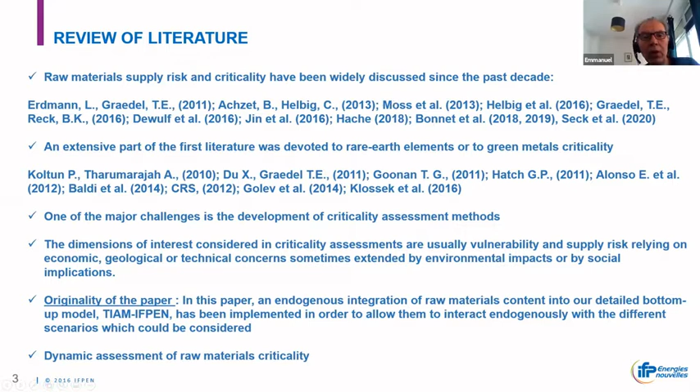So let's just talk about the model in a few minutes. As I told you, we use a TIMES MARKAL model, named TIAM-IFPEN. This is a world model. This is a partial equilibrium model. The objective function of this model is to minimize the cost of the entire system. The model is disaggregated into 16 different regions, and each region can trade fossil fuels, can trade materials, can trade emission permits.

What is interesting, and you can see that in the figures, is the fact that all the technologies, I mean conversion technologies, are also represented in the model, such as the different sectors: industry, commercial and services, household, transport.

On the right, you can see the demand. We compute exogenous demand in the TIAM IFPEN model. The main question that this kind of model can answer is dedicated, for example, to climate change, but also to security of supply, more especially for security of raw materials, and more globally to a condition of feasibility for the energy transition.

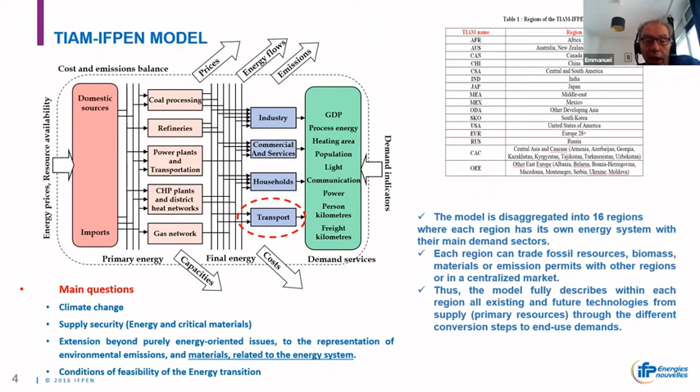I show you briefly how we disaggregated the transportation sector, because we'll talk about battery. In our model, we have different technologies: passenger car, bus, minibus, commercial vehicle, 2 and 3 wheelers. For each type of car, you have different ranges - small, medium, large - with different kinds of motorization and different kinds of fuels.

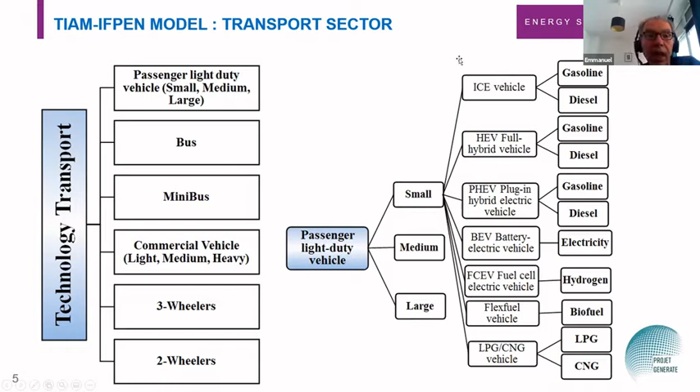Also, in order to assess metals criticality, we implemented the value chain of each metal within the model. I give you an example for lithium on the left and copper on the right, but this is the same kind of modeling we use. We evaluate the resources - conventional and non-conventional - and we put also conversion processes with energy cost, emission, and we implemented trade. For example, in lithium, you can trade the ore or the oxide, and we have the same kind of stuff for sectorial demand.

So what is the aim of this kind of model? It allows us to evaluate the consumption of materials with regard to the deployment of low carbon technologies, but also the trades of these materials between countries at different points of the value chain. And in order to do this, you need to implement the material intensity for each of the low carbon technologies - for electrified vehicles, but also for wind, solar, etc.

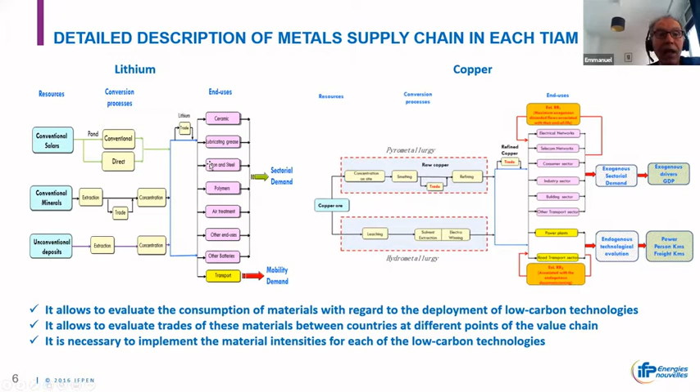What we did, we ran 4 scenarios where we considered 2 climate scenarios with 2 different types of mobility. The 2 climate scenarios: one we call the 4 degree scenario, meaning we are limiting the expected global average temperature increase to 4 degrees. For the 2 degree scenario, it's exactly the same thing, but we are limiting global warming to 2 degrees.

For each scenario, we also add 2 different shapes of mobility: what we call a high mobility or business-as-usual mobility, and also a hypothesis of sustainable mobility. What is sustainable mobility in our case? In our modeling, it means we have a very interesting optimization of the transportation system, but also public policy directed toward added public transportation, etc.

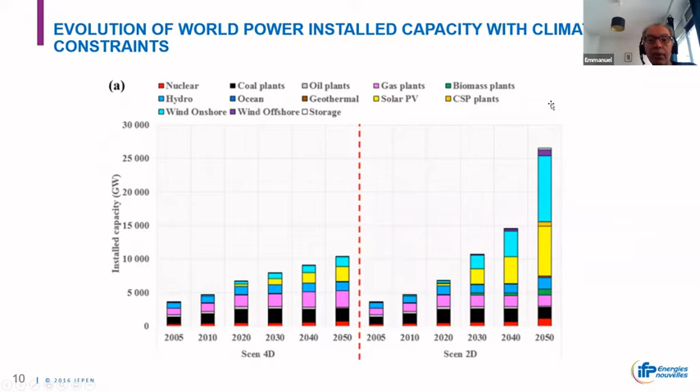If we look at the first example related to lithium, lithium is widely used in lithium-ion batteries. If you look at our results regarding cumulative production, you can observe it for the 2D scenario or the 4D scenario, each with a different shape of mobility. You can see that comparing 2D and 4D, you will have much more mine production of lithium in a 2D scenario.

But what is also interesting to look at is geological criticality. What is the amount of lithium we will produce, and can we compare it to global lithium resources? This is the number you see here. How to deal with the 32%? It means that between now and 2050, we will consume around 32% of global lithium resources.

I do not talk about reserves, I talk about resources. We took resources because reserves can move depending on technology and price, but resources are more consistent with what we call geological criticality.

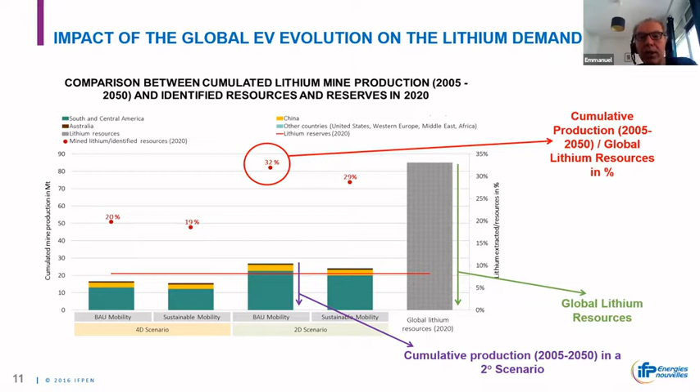We also look at copper, because we consider it very important to look at structural metals. If you look at the material intensity of low carbon technology, here on the left, you can see the copper content for different types of vehicles.

For example, for a small size passenger car vehicle, each vehicle will have 20 kilos of copper per vehicle. But if you go to a pure electric vehicle of the same small size, you will have around 80 kilos of copper per vehicle. So material intensity, for example for transportation, is higher for low carbon technologies than for traditional technology.

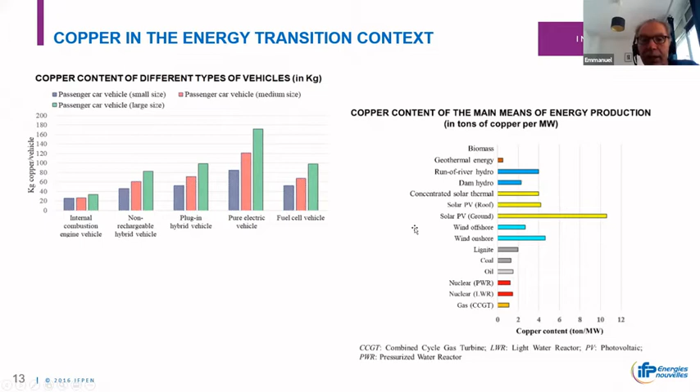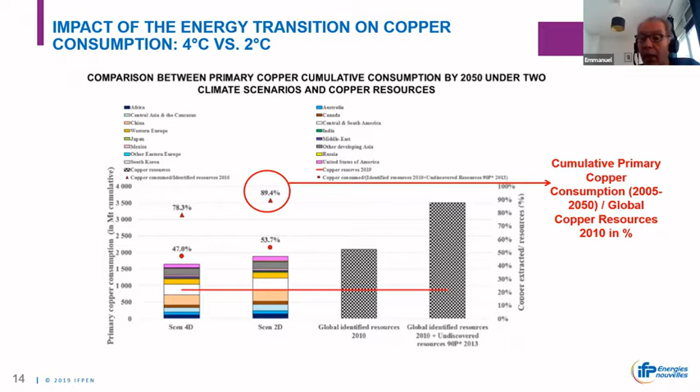In the case of copper, when you assess the same kind of geological criticality, you can see that from 2005 to 2050, we will consume around 90% of global copper resources. This is the material that can be considered the most critical in our study. We should have a problem with copper, because it's widely used in the power sector, but also in the automotive sector.

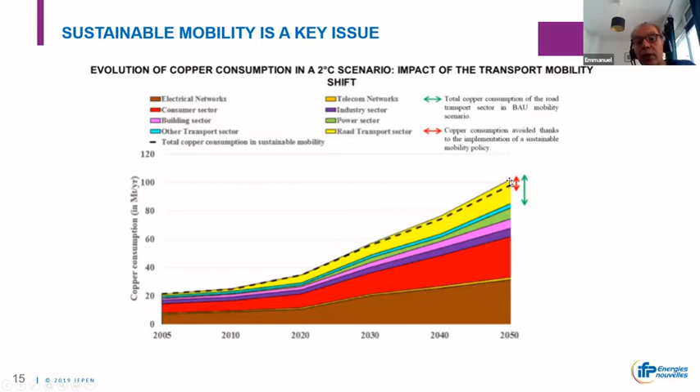But with this kind of model, you can also assess different public policies in order to reduce criticality. For example, if you switch from business as usual to sustainable mobility, you can see on this graph that you can avoid a certain amount of consumption. It's exactly the same with recycling, because we put recycling in our model, and it can help reduce the criticality of the different materials.

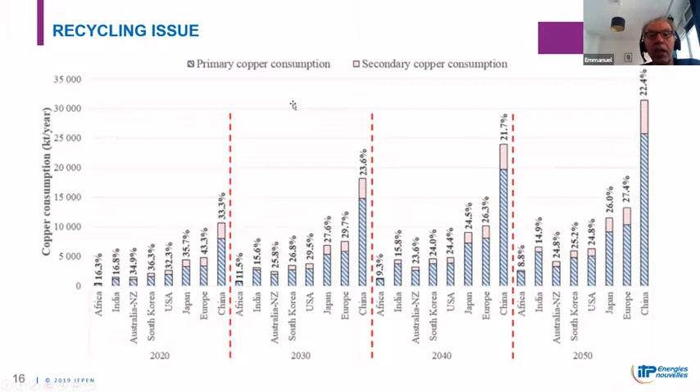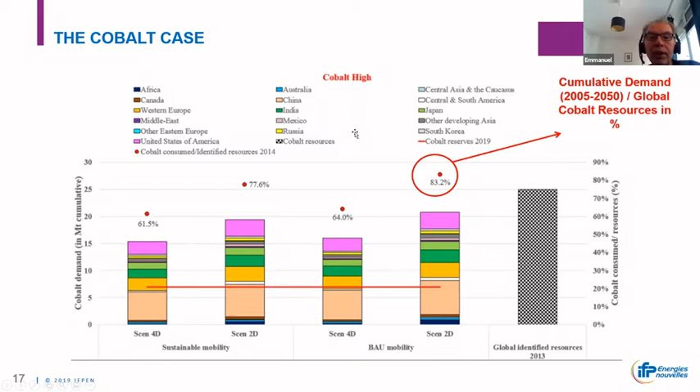If we go now to cobalt, this is exactly the same kind of graph. If you look at cumulative demand reported to global cobalt resources in percentage, cobalt in 2050 will also be highly critical, because we will consume around 83% of global resources. How to reduce criticality? For cobalt, one option is to change the kind of batteries used in the automotive sector. We modeled different kinds of batteries - a high cobalt content battery, a middle one, and a small one - and you can reduce criticality from 83% to 64% depending on the kind of batteries you use.

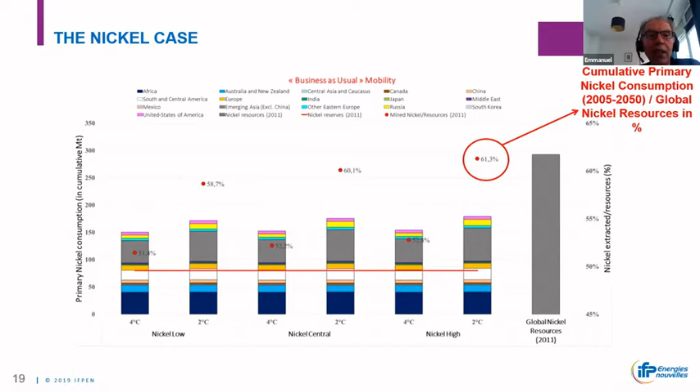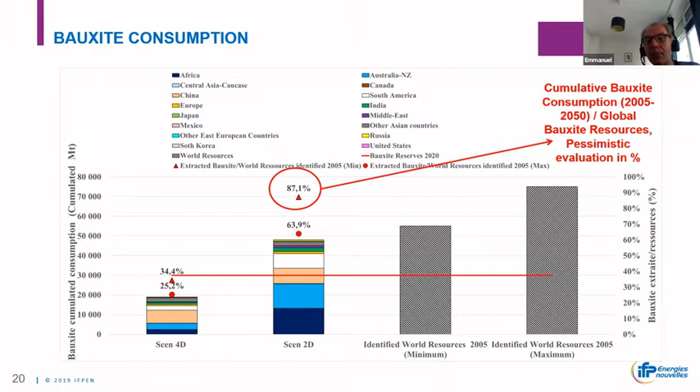If you go to nickel, geological criticality is around 61%. And if you look at bauxite, which is widely used to produce aluminium, the geological criticality is around 87%. So what can we conclude?

All the scenarios that we develop in this presentation or in this article tend to show that the energy transition dynamic could lead to a decrease, a huge decrease, in the metal safety margin in a 2-degree scenario.

I mean, the most constrained scenario, with business as usual mobility. And what is also very interesting is the fact that if you compare what we call structural metals...

and strategic metals. If you look at newspapers, everybody is talking about lithium, everybody is talking about rare earth. But if you look at the results we have regarding these different scenarios, you can see that the most...

critical metals regarding the energy transition will be first copper, and second bauxite. After that, for sure, cobalt will be critical. Nickel is a little bit critical too, but lithium and rare earth have no geological problem related to their consumption or production from now to 2050.

Now we have a very famous quotation, which we always say when doing a presentation: small metals, small problems; big metals, big problems. The fact is that we consider that public policy should focus on structural metals first, because they are widely used in different sectors, not only in automotive or power sector.

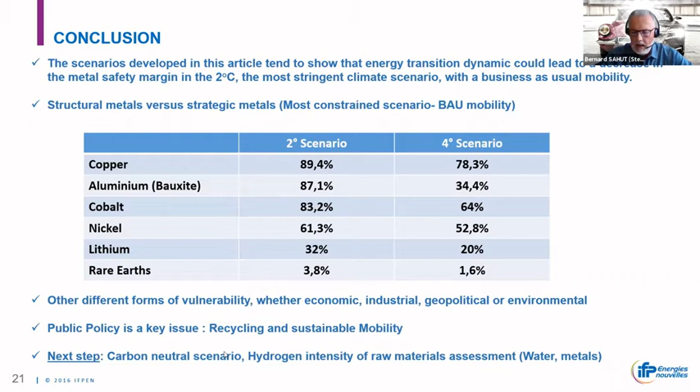Thank you. For the second presentation, we will have a presentation from Etienne Sorin from the EDF R&D department. Etienne is a research engineer at the EDF R&D department in the Economic Operation and Study of Energy Systems in Paris. His research interests are mainly storage economics, electricity markets, and ancillary services market design. He holds an engineering degree from École Polytechnique Paris, as well as a Master of Science in Sustainable Energy and Electricity Markets from DTU Copenhagen in Denmark.

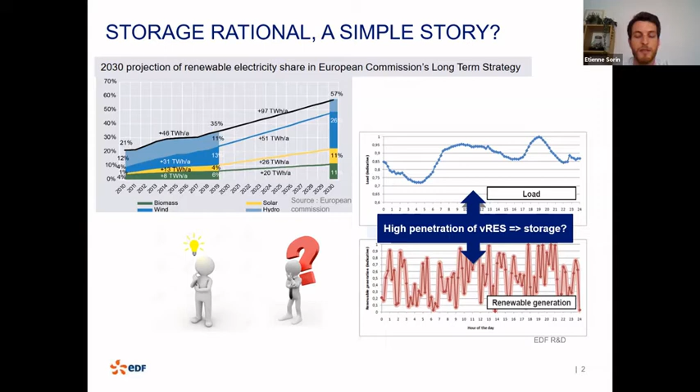The answer relies on many factors, and the first is defining the need for flexibility that drives the penetration of storage. We have an increasing, quite standard, increasing penetration of renewables that requires increasing need of flexibility on the electric system to match at all times the load and the renewable generation. That's a critical aspect of what's going to drive the technologies that win the market in terms of storage penetration.

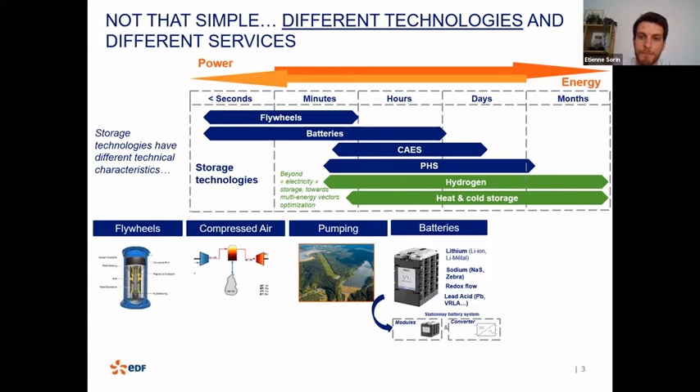We have also some other storage, for example flywheels that are dedicated to very dynamic products. Some are more lengthy storage with compressed air energy storage, and others for long-term storage with hydrogen and heat and cold storage. Of course all of the technologies are not here, but it's just a first overview of the technologies and a way to compare them.

Then, to match these technologies, we have different systems required to operate the different services needed to run the system. They can also be compared in terms of how dynamic the product is, or how much energy is required to provide this service. We can see that there is a whole range of services that corresponds to the whole range of power and energy storage technologies that we have.

Most of them are well known. You have all the energy shifting at the bottom. You have some peak shaving here that are hourly products, but depending on the application can also be a bit longer. And you have some very dynamic applications such as frequency regulation. Of course, the way to provide these services will depend on a country-by-country basis, on the electricity mix and so on.

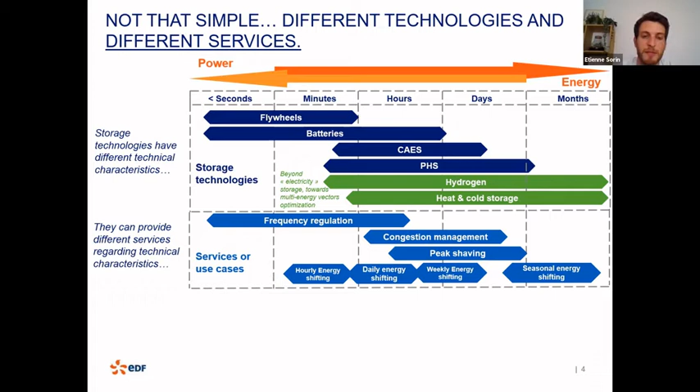Then, if we want to go a bit further into comparing storage technologies, we need to look at economic and technical indicators. Usually the first one we use is maybe the capex, so usually the annuity of capex, which gives us a first overview of the cost of a storage technology. And then if we want to go a bit deeper, the next indicator that comes to mind is the LCOS.

LCOS stands for levelized cost of storage. A good way to introduce it is to compare it to the LCOE, the levelized cost of electricity, which is usually used to compare generation assets. The LCOE gives us the average price at which the electricity generated by an asset needs to be sold in order to cover all the costs needed to build the asset and operate it over the whole lifetime. For the LCOS, it's exactly the same.

The LCOS assumes that the storage will be something similar to a generation asset, and compares, depending on how much the storage asset has injected onto the grid over its lifetime, what is the average price at which this electricity needs to be sold in order to compensate all the costs of the storage. But unlike the LCOE, storage technology is a bit more complicated because if we inject into the grid, we also need to withdraw electricity from the grid, so we need to include costs related to that.

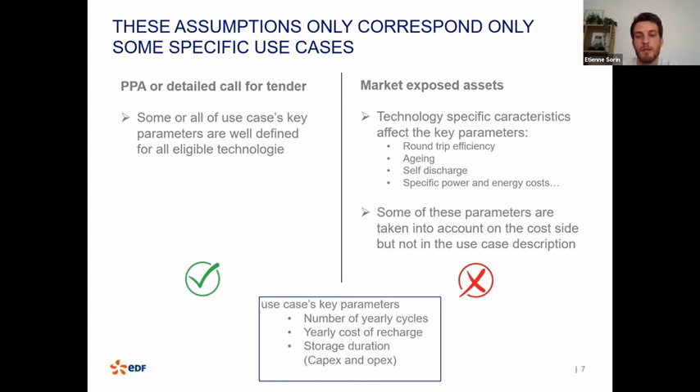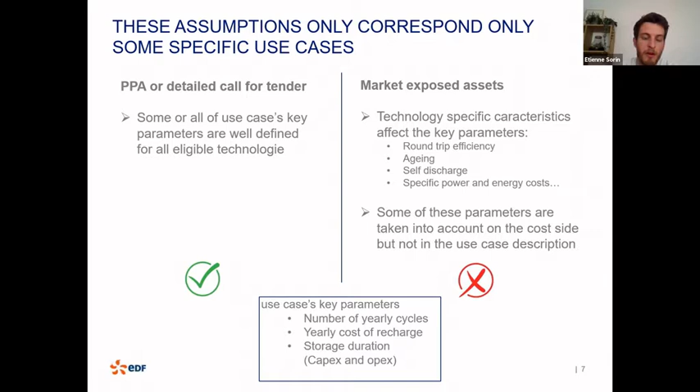But if we go for more market exposed assets, then if we look at how the storage technologies are driven, we see that there are some other parameters that need to be taken into account to understand how much a technology will be operated, how much it will cycle, and what is the optimal size required. Some of these parameters are round trip efficiency, aging, self-discharge, and so on. We need to take all these into account to find an optimal dispatch, optimal sizes, depending on the services needed, which means it's not possible to have a fixed assumption to compare all technologies. So that's the first point.

If we want examples of why it's not true to have fixed assumptions, the first is to look at wholesale arbitrage. That's the most common service usually mentioned for storage, in which we buy electricity on the wholesale market at a cheap price and sell it at the highest price possible.

Here we simulated an optimal dispatch of different storage technologies depending on round trip efficiency, on several price series from historical data. We checked what is the optimal number of cycles per year the technology should be operated on, and we see that round trip efficiency has a huge impact on the number of cycles a technology will be operated on.

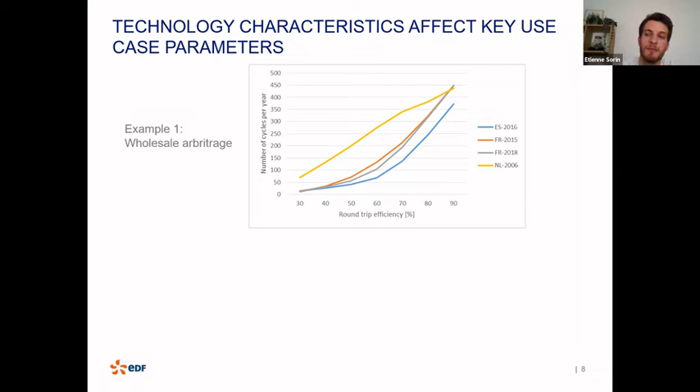For example, technologies with very high efficiency have very low losses, so they need a very low spread of prices to cover the losses. Whereas technologies with low round trip efficiency need very high spreads to cover losses, so they cycle very infrequently because such spreads are rare. So the number of cycles is affected, which means the LCOS of this service from a market exposed perspective will also be affected.

The second example is for FCR, frequency containment reserve, the service I mentioned before. If we look at pumped hydro storage, the optimal approach is to not take too much into account the energy sizing, because it's not impacted by the service but rather by exogenous factors. The power sizing of the asset is also independent of the energy sizing.

For lithium-ion batteries, on the opposite, power and energy sizing need to be thought of as a combined optimization process, and we also need to think of a continuous recharge strategy that bears a cost on the technology. So to provide the same services, there is not the same question we need to ask ourselves to find the optimal product, sizing, and dispatch of a given technology.

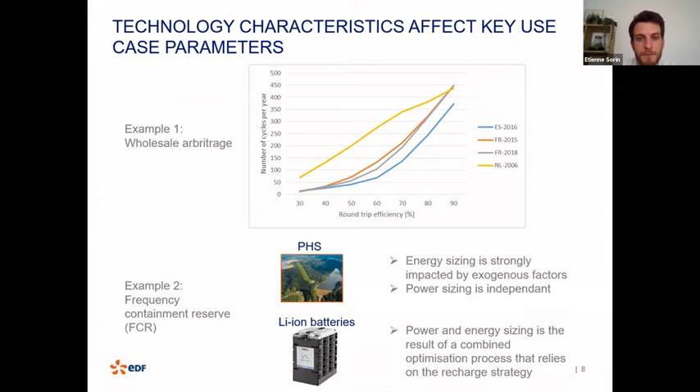The second point that could be a limit to the LCOS when looking at market exposed assets is that in practice, if we look at storage assets developed today, they are mostly on a multi-service approach.

Here's a simple example of a multi-service approach, one very common in Germany, where peak shaving is a quite remunerating service. We have lots of lithium-ion batteries built to provide peak shaving, for example for industrial or residential consumers. The fact is that providing peak shaving services only impacts a very limited number of hours, maybe 10% of the hours of a year. If we don't use the battery for the rest of the year, it's a stranded asset, and we lose the opportunity for better remuneration.

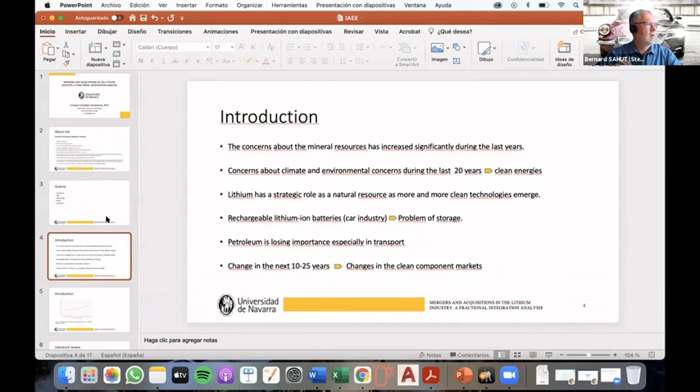I'm sorry, Enrique, we are still on the outline slide. Oh my God, yeah, I think yes, I'm sorry. It's still not scrolling, I'm gonna try again. You see the introduction now? No, it's still outline. No, it's still on the outline. Let me, we saw maybe you just unshare, and then once you unshare. No, I'm gonna, let me just do this. Now you see, yeah, the screen? That works too. Yeah, it works. It works much better. Yeah.

Okay, thank you. As I said before, just a little motivation of the topic. The concern about mineral resources has increased a lot during these years, basically because, as I mentioned, the development of the car industry, the electric car industry, changed the demand for minerals like lithium, which is basically used to manufacture lithium-ion batteries. So this problem of storage has increased the demand for lithium in this case.

So we observe a lot of changes in the market, and one of those changes is that we observe an increasing trend in the number of mergers and acquisitions in this market. So we observe a concentration of companies in this sector, and this was mentioned by the first speaker. I think he said that 5 companies in the market cover 90% of the mineral market, so it is a very high concentration in this kind of market. So we are interested in analyzing this trend in the future with this paper. Obviously petroleum is losing importance, especially in transport, and it is expected to change to electric cars in more or less 10 to 25 years.

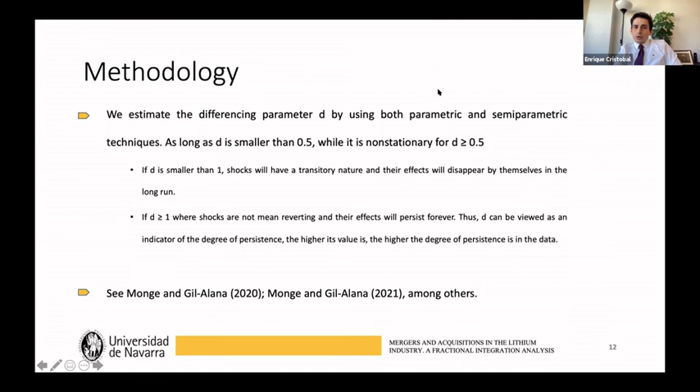So that's the main result. First of all, the results based on this parametric approach produce some conflicting results, because the criteria involves results above and below 0.5, and results are conflicting. But under autocorrelation, which is apparently the more realistic approach, the estimated value of D is much larger and above 0.5, implying a non-stationary pattern. So from the parametric approach, we can say we observe a non-stationary pattern for this series.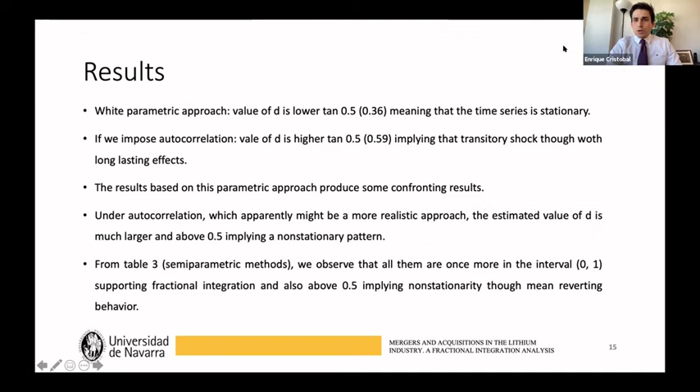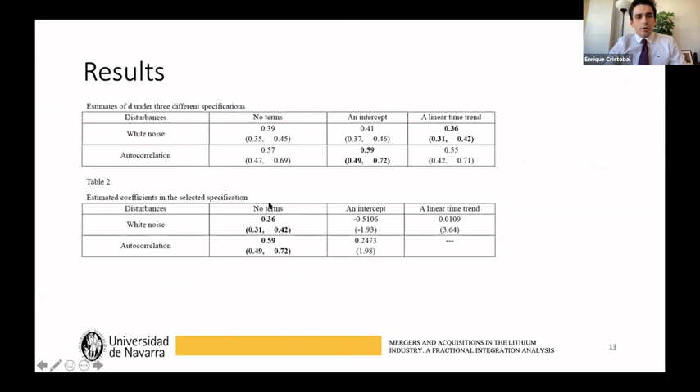So with these results, the main conclusion of the paper is: first, our results suggest that both series are fractionally integrated and mean reverting, as the estimated value of D is lower than 1. So for the first criteria, the value in both cases is lower than 1, both for the white noise and imposing autocorrelation -- the values were specifically 0.36 and 0.59. So in both cases they are lower than 1, imposing autocorrelation and white noise.

Nevertheless, it seems to be stationary under white noise, but non-stationary under autocorrelated disturbances, which is basically the approach we choose in this case. And performing the parametric approach, we also mentioned that this implies transitory shocks with long-lasting effects.

So basically, after this econometric approach, the main conclusion for this series we analyze -- remember, we are analyzing the quantity of mergers and acquisitions in the global market -- is that the impacts for the lithium industry will be transient and are expected to disappear on their own in the long term. In other words, these shocks in the market are not going to be fixed for the future, and we expect to have the same levels in the long term, possibly because the market cannot absorb more mergers and acquisitions.

This is a big market, but not many companies are participating in the market right now. So obviously in the future, not many more mergers and acquisitions can be carried out, and that's probably why our model is showing these conclusions. So that was basically the paper. If you have any questions, please let me know.

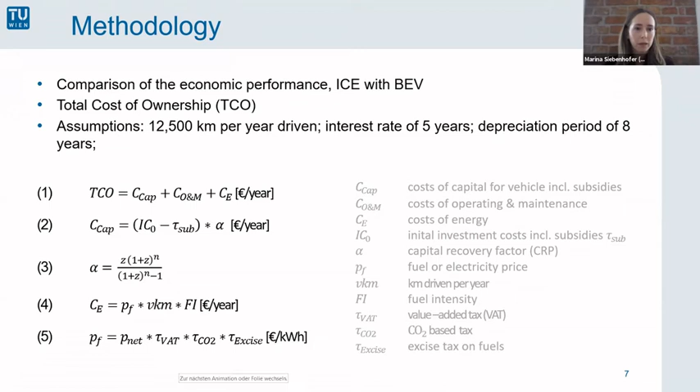So in the following, we applied this method to calculate TCO for two specific cases. For small cars, we compared the costs of a VW Golf and the VW e-Golf. For large cars, we analyzed the costs for an Audi A5 with the Tesla Model 3. We compared the TCO for countries with some relevance of BEVs: the EU countries Austria, Germany, Netherlands, Norway, and furthermore China and California. Moreover, we calculated a sensitivity analysis with a change of the interest rate and the depreciation time.